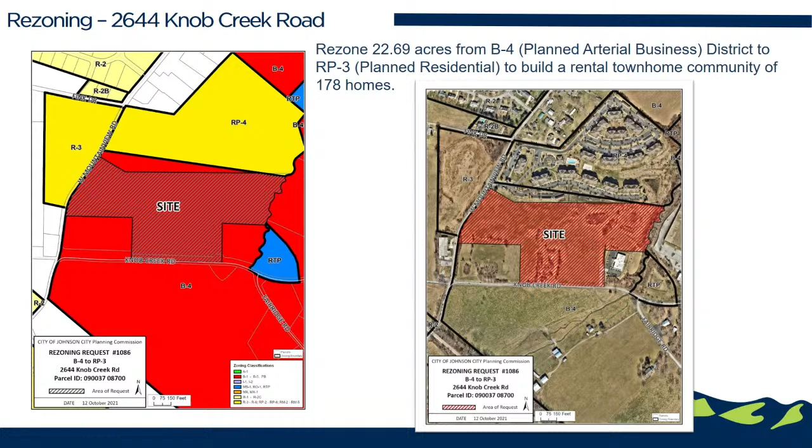What they're looking to do is 178 townhome units. These would be rental units. The site plan in your packet is the same as this one, just a little cleaner, and that's why it was emailed out as well.

But they will have 2 points of ingress and egress. They're utilizing this common shared area with the FBI agency, and then as well coming out on Mountain View. They're going to share, this has already been planned before, the stormwater detention area that's been built right back here.

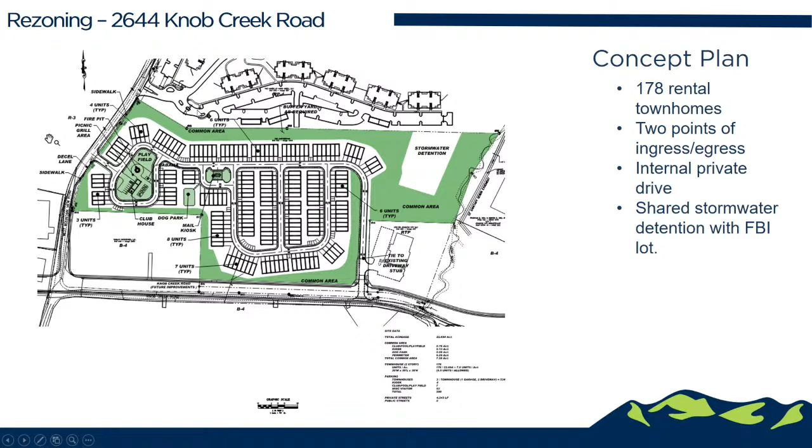One of the things that staff had talked about was a connection, some sort of street connection here, because there is a stub. What makes that a little improbable is because there is actually a gate here, which would make that, again, not something that would be super practical.

In your staff report, we were still kind of working through some things, and they have addressed some of staff's issues since when we needed to publish the report. So while they had shown how much open space they had not calculated it, and that has been provided.

Part of the RP3's intent is to create this unique way of developing property, of which you also consider a pedestrian, or how people get around. And so they've included their internal sidewalks and then notations for sidewalks on West Mountain View.

They will, because of the Knob Creek Overpass project, at this point putting in sidewalks on Knob Creek would be a little futile, so the city will kind of take care of that. But the owners right now have taken care of making sure that we have enough right of way.

The engineers on the project are the same engineers for the Knob Creek Overpass, so there is a lot of talk, and there can be a lot of compatibility in being able to engineer around things. I would like to bring up the Knob Creek Overpass because it's probably one of the most talked about things with this request. This is not the right one. Oh no.

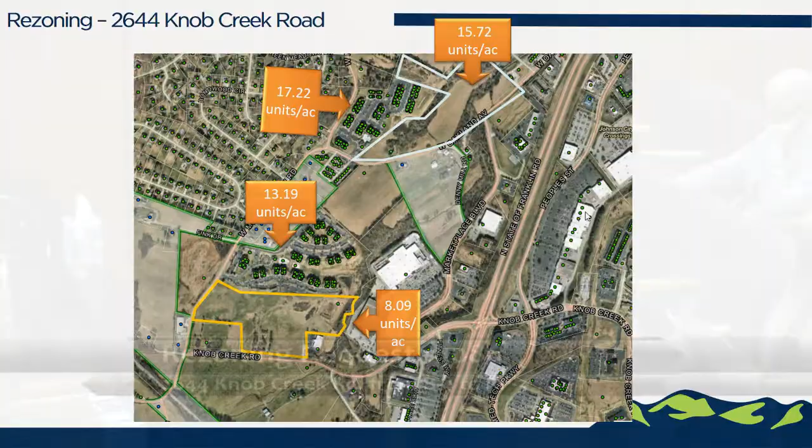Could you go back to your slide on the traffic? I just want to make sure I understand. So with the townhomes, what was the total number all day? 1,170. Okay, so you're talking about 10 trips per day per unit, and there's going to be 178 units? That'd be like 1,700. I'm getting my math wrong. Okay, thank you.

So Knob Creek and Mountain View are collectors or arterials? Yes, they are. They're collectors. And when you were talking to the engineers, I know we just upgraded or did some road improvements on Mountain View, and I know Knob Creek is eventually going to be upgraded.

Are there any other, I mean, is there going to be any widening of turn lanes, ingress, egress? They will have to provide decel lanes as part of their project.

Thank you. And Brandon Paschal is here, who is the engineer with our staff that has been in charge of the Knob Creek Overpass project. So if you have questions about that, he would be the person to talk to, to answer them.

Is that question like, when? We are doing things in the right direction. Last Thursday, there was an approval for an increase in monies for land acquisition, which is something that is needed. It's all these little steps, and we're doing all of our little steps.

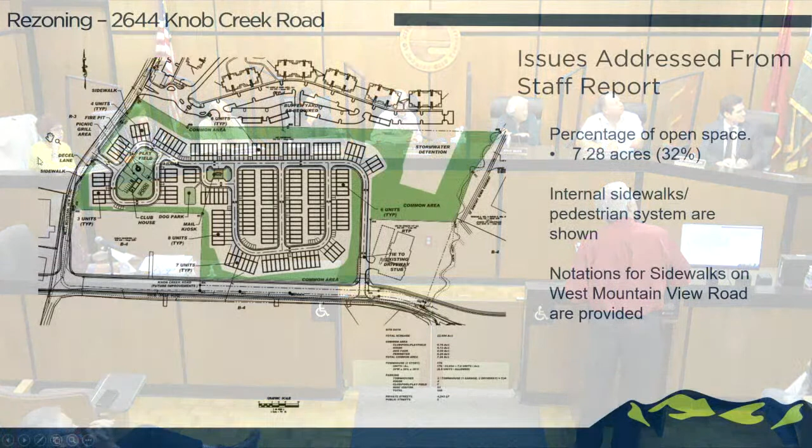The project, the overpass project, will end right around in here. So the rest of it would be the responsibility of the property owner to build any sidewalks up through here.

But would those be required under current code, or sidewalks required?

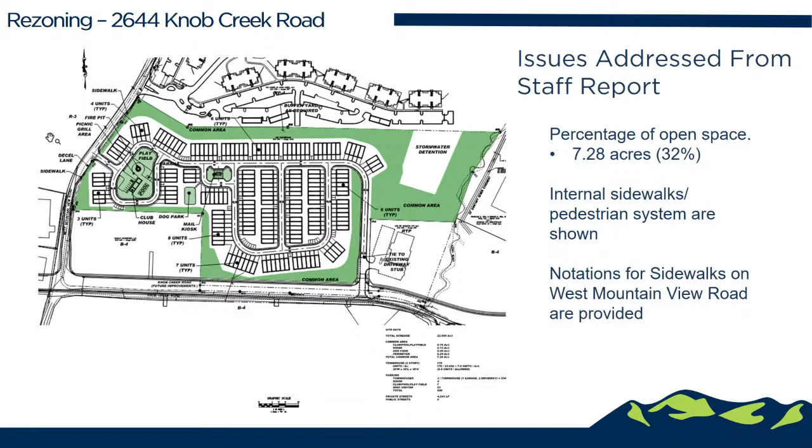Thanks, sir. Could you also kind of talk us through where the new overpass is going to come down and then integrate into West Mountain View Road? But then again, Knob Creek Road's going to be impacted as well. What will we be doing to those 2 roads to accommodate the additional traffic flow?

There's going to be 5 lanes all the way from Marketplace Boulevard, all the way through here. And then instead of turning left to go through the underpass, we're going to go straight ahead, across the railroad tracks, and then tie back into Knob Creek Road up here.

Claude Simmons Road will come around here and just connect into this old section of Knob Creek Road. And this portion right through here is going to be eliminated, so there won't be any traffic through here at all.

And this will be called Claude Simmons Road, all the way back up to Knob Creek Road here. And Mizpah Hills Drive, Road, whichever it is, will connect into Claude Simmons Road, right through here.

We bought the 3 properties right in here in order to make a good intersection right through here. We will have a traffic signal here, and do some upgrades to the traffic signals down here.

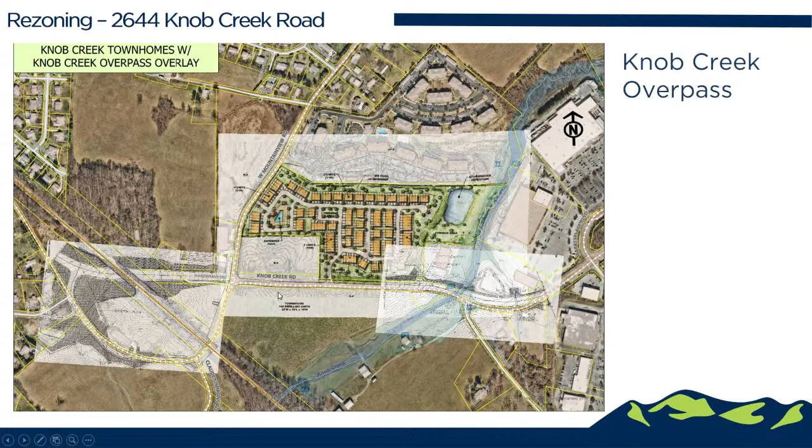So, Mr. Paschal, is it the city's policy that when the city does road improvements, if sidewalks aren't existing, they put sidewalks in? Yes, we try to put five-foot sidewalks wherever we have an improvement.

Has a traffic study been done on the impact of the overpass when it's completed, what that's going to do to traffic in that area? I believe so, but I have not looked at that.

Thanks, sir, appreciate your time. You're welcome.

This is redundant, but I need to understand, will the road work be done before we begin this facility, or are we going to have a backlog of traffic? I believe, no, they will probably not begin simultaneously. This one would begin first.

But I also think that traffic is headed towards town instead of under the underpass. Most of it, the majority, would head the opposite direction, towards State of Franklin, taking Mountain View out towards Browns Mill. But yes, there will be an increase in traffic in that interim period.

Whitney, I remember reading that the closest bus stop is beyond the FBI office. It is, it's rather far. That's what I was going to say. Is there any plan to put it closer to that development since there's going to be so many residents?

the land developer is a different entity than the home builder. Sometimes when it's the same entity, they will be more flexible in their lot configuration. But this particular home builder, D.R. Horton, really prefers and expects out of their land developers that all of their lots be as rectangular as possible, or as geometrically appropriate. They really try to avoid misshapen lots.

And so in a situation like this where the road is curving, you would have had a bit of a conflict with these four lots. So what this does is it opens up the right-of-way, creates four nice rectangular lots, and there's an agreement that the HOA will maintain that.

Preston, can you back out on that image, or did you have one that showed more of Phase 1, 2, 2A and 2B? Sure, I can go back to that one. Are there open spaces on the earlier phases? Yes, can you point those out?

There is an overall open space requirement, and they have met that, but it's identified in each of the different phases. These two big tracts right here are the BMP devices, or the stormwater devices—one right here and one right here. Those are the two stormwater devices.

And then this piece right here is part of the open space for 2A, and I believe this back here is also part of the open space for Phase 2A. And then you'll see here, what's hatched is open space for 2B, which includes this square right here. There's less open space in Phase 1 simply because those are just lots platted off of Willow Springs Drive, and the bulk of the stormwater devices were right off of Willow Springs Drive.

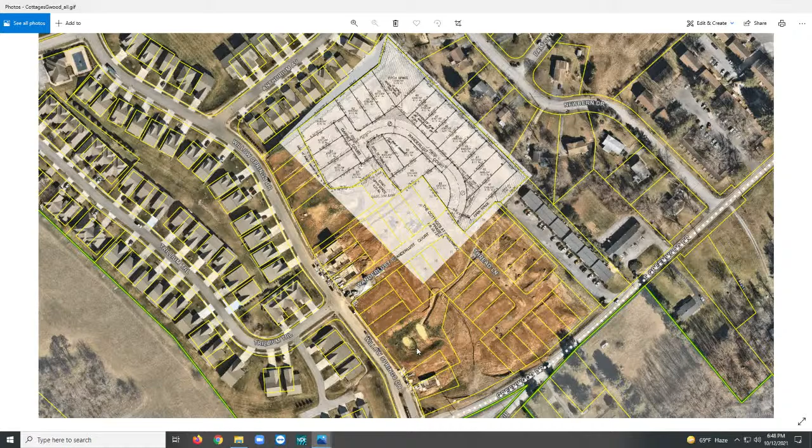Is there an expressed intent of what those open spaces will look like when the development's completed? They will not be active open spaces. They will be green spaces, but there was no plan at the preliminary stage that they would be designed in a way that they could be activated.

That's absolutely part of the conversation. There's Peyton right there. One of the things we're so excited about with Peyton coming on board is our ability to begin tackling some of these policy initiatives, and that's one of the policy initiatives on your goal set.

Can we go back to the variance, the deviation? Yes, ma'am. I can see where they've requested to go from 7.5 feet, which we've established in policy, to a variance of 5 feet. Why are they requesting this? I don't see any justification for it.

Why do they need it to be 5 feet instead of 7.5? There's a couple things to consider here. It's easy to treat the drainage and utility easement the same as a building setback, but it's not. You can't have a structure in it, but it's not acting as a setback. Meaning, if the drainage and utility easement wasn't a requirement in the subdivision regulations, the zoning code, the development standards in this particular zoning district have no side yard setback. So there is zero setback in the side yard. It's that the subdivision regulations have this additional drainage and utility easement.

City water and sewer are provided to the properties, and as Commissioner Pavlich had noted, the installation of a private sewer pump might be required to provide sewer to Lot 1RA, which is this lot right here. You may have seen in your iCompass backup material that at the time this was placed, Mr. Ryder noted staff recommends approval of the final plat contingent upon that note being added. I can confirm that note has been added, and the plat was uploaded, I believe it was yesterday. So that has been completed, and at this point, the recommendation would simply be to approve.

For reference sake, to get you in the general vicinity, this is Peoples Street and Avonlea Drive. This is at the bottom of the hill here, just down from the new senior living facility, Everlawn. And if you made a right here, it turns into Browns Mill, where you may recall the rezoning request just up Browns Mill. So this is here at the intersection of Browns Mill, Peoples, and Avonlea.

You can see the properties, as they're currently platted, are in yellow. So you'll see here that what they're doing is carving up this parcel and creating these lots. Again, as noted by Mr. Ryder, they meet all code requirements, and the note has been added.

I thought the city had a policy against private sewer. No? No, the sewer is still going to be public, but there may be... I mean, they're going to be on septic? Is that what that means? No, we're going to pump it up to the street? No, they would need to pump it up to sewer. Okay, right. Public sewer, but there may be a private pump. I got it. A deviation in elevation. I got it, thank you.

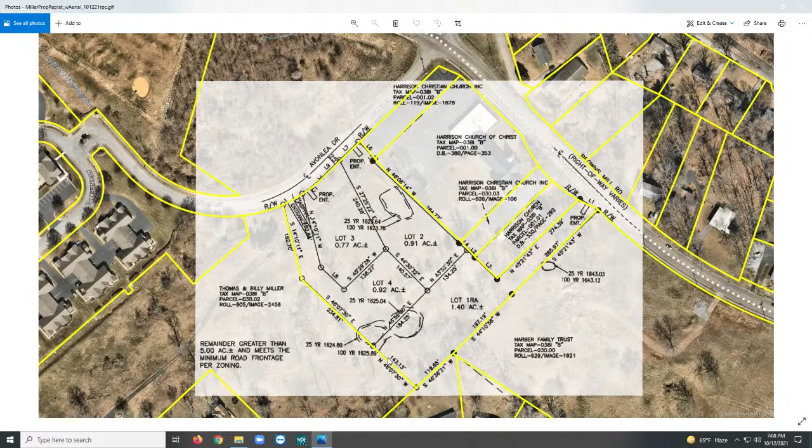So if these depressions identified on the plat are in fact sinkholes, you can see Lot 4 can be built in this area right here. On Lot 2, you'd be able to build in this area right here. Lot 3 you'll see is unimpeded. And Lot 1RA is also roughly unimpeded except for this back area. So if they were creating lots that were fully encumbered, then I think it'd be a different conversation.

Okay, I was just making sure we don't have any due diligence issue on our part. No, not that I'm aware of. And again, there are buildable portions of each lot outside of those identified areas.

Thanks, sir. Would that not be addressed when permits are being sought? Absolutely, if we know. So back to your question, Ben, there definitely are sinkholes out in that area. They're all over town. We have them, but it's about the knowledge of the buyer that they're there. So we couldn't tell from this little plat right here if any have been identified. You've got these circles, and I guess that's what kind of triggered the question.

Those are sinkholes that are identified there, and it says on the plat and the plat note that there are visible sinkholes. Oh, okay. And we do have a sinkhole ordinance, so that does regulate development around sinkholes, so that's what they've done. They identified the 25-year and the 100-year. Thank you for doing that.

Appreciate the information. Is there any concern from water or sewer on this? Sinkholes? No, I mean, they would have had to have addressed that - we would not have put it on the agenda if it was not approved.

For example, on the last one, I was getting confirmation from Mr. Olinger on Cottages at Greenwood up all the way until about 5:15, so.

Make a motion to approve. Second? We've got a motion and a second to approve the plat of the Miller property. Do we need to include the private sewer in the motion? No, it has been - the note has been added.

Really, it would just be Harmonize and whatever Mr. Smith has going on in there. Is this approximately 100 feet, this new section right here, that section you were just talking about? It's a right-of-way a little over 100 feet, so somewhere around 100.

Where do our garbage trucks turn around now? I don't know, that would be a Public Works question. Do we provide public sanitation to industrial areas, or are those private pickups? That would be an Andy Best question maybe, but it's in the city. I just don't know whether or not, forgive me, I'm going off some of my old history. Cities don't always pick up everything, sometimes it's contracted, but maybe we do.

I don't know. Well, now you've got Harmonize going out there, so what are their needs? Where are the utility lines right now? Well, they're in various locations. I can confirm for you that water and sewer to the proposed Harmonize facility actually has all their services coming off of Plymouth Road. So we did confirm that.

That was in conversation with Mr. Peterson, that those access points are off of Plymouth. These are coming off of, I believe, down here where Rocky Top ends, where the right-of-way ends. So the easement will be no more than just physical. Correct.

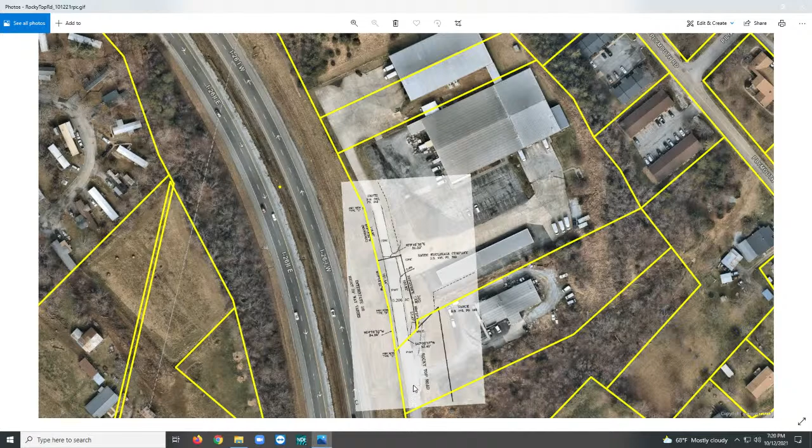My name is Tim Lingerfeld, I'm with Alley and Associates from Kingsport. I'm representing Mr. Smith in this matter for the dedication of the right-of-way. The only reason I desire to speak is to respectfully request that you approve the dedication as presented, and not get entangled in the easement that has come about in the 11th hour, which has yet to be defined, as this gentleman just spoke to. That's really all I have to say unless you have a question for me.

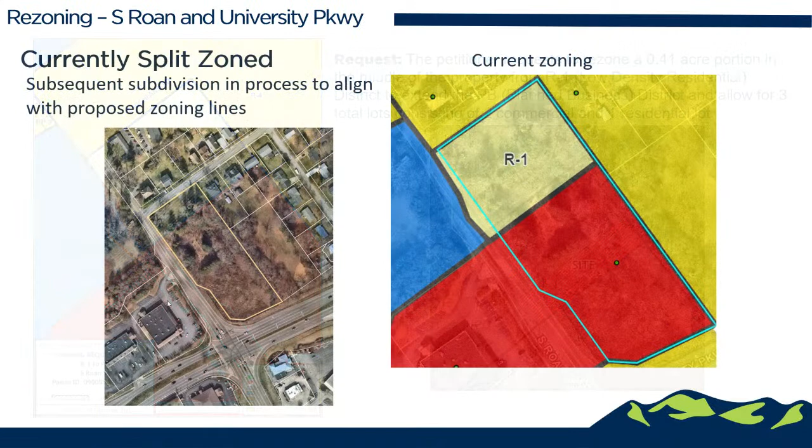At the staff level, we are still working out with the applicant, TDOT, and our engineering team exactly how these turn lanes are going to work. Right now we're not sure how it's going to look, or if they'll be able to have a turn out this way and this way. So what you guys would be approving is the driveway location.

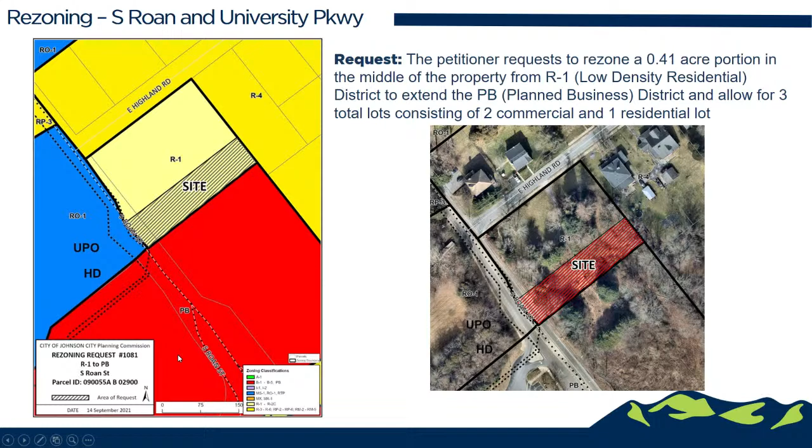I'd like to remind everybody that the rezoning line is up here, and the driveway falls a decent amount down here. So the driveway doesn't actually impact the rezoning, and we would be having this conversation with the applicant whether or not this rezoning was in front of you guys tonight.

Going back to current and future land use, it's delineated as residential in the future, but because of its location, staff believes commercial would be a good use. And to remind you guys, you did recommend approval last month by a vote of 7-0.

Is this a rezoning or a change to the concept plan? It would be a concept plan amendment if it had gone all the way through City Commission, I believe. But because it didn't go all the way through City Commission, they're changing their concept plan. It's the same rezoning you guys saw last time, but because of that change in driveway location, it has to come back in front of you guys to get approval.

So it hasn't been in front of City Commission at this point? No, it has not. It got pulled and put back in front of you guys. Okay, so it hasn't been in front of them. Thank you. Correct, so I don't believe it qualifies as a technical concept plan amendment, though I could be wrong on that. That's helpful, I just didn't understand.

Will that have any impact with cars pulling out quicker at the top of the hill, affecting people on Highland trying to pull out? So up here from Highland, does it have any effect on the cars coming out here? The problem we discussed last time was if you're at Highland and you want to turn left, you're at your own risk, and I still have grave concerns over that.

I'm assuming TDOT totally nixed any cuts on the University Parkway side.

Let me add one thing. One thing I can add, which is very good news since your last consideration, is that if you recall, this parcel and this parcel had not yet dedicated the appropriate right-of-way for Public Works to come in and make improvements to South Roan Street. Since that meeting, remember this is the concept plan, the plat has come back in and they've dedicated all of the appropriate right-of-way along South Roan Street. In fact, that was part of that 5:30 conversation with Phil and Lawrence. We were in that conversation and confirmed that all that right-of-way has been dedicated, so Phil and his folks have adequate room to come in and make the necessary improvements to South Roan.

So is there an appeal process with TDOT when they say we have to leave this fence here? Because honestly, this place would look better without that fence there, that chain link fence. How do they have the power to say you're going to leave that fence there when, based on the city and the aesthetics of that corner, it would look much better without it? And that fence is doing nothing for that interstate right there, zero.

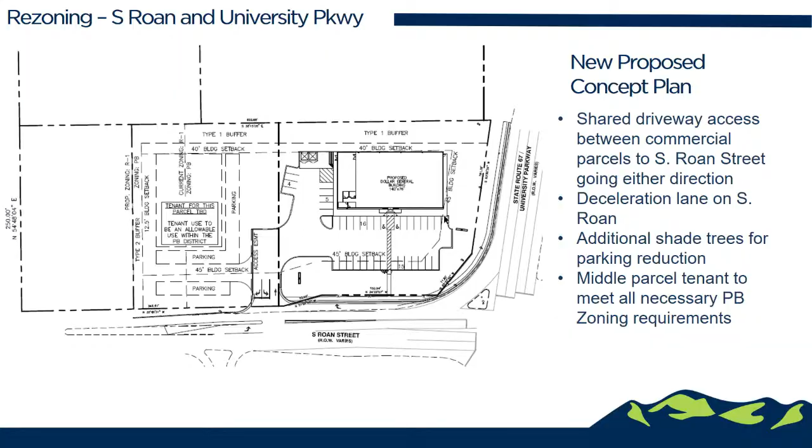I guess from what the staff is recommending, the rezoning request is the same, the concept plan slightly different with the access location. The exact configuration and engineering of that access, we'll keep working with the city on, just as we would do even if there was no rezoning request.

So if you are not allowed to move that line of the fence back so that it's a straight line, you don't have room for a decel lane? Correct. But they have indicated they would be in favor of approving that. They've changed their mind before. They did.

The request to reduce the length of an access fence is a much larger request than simply changing the angle. Okay, I understand, thank you. Questions?

Do we have any idea how much fence is removed in the state of Tennessee in these areas annually? Anybody here? In Nashville, a lot.

The process goes through an excess land committee. When TDOT does projects, they typically overbuy land, get more easements than they need, making sure they get everything up front. Then they finish a project, a widening or interstate ramps, and once everything settles out, if they've over-purchased right-of-way or created true excess land, people can petition the excess land committee to purchase that land back from the state and put it back in the tax base and the city.